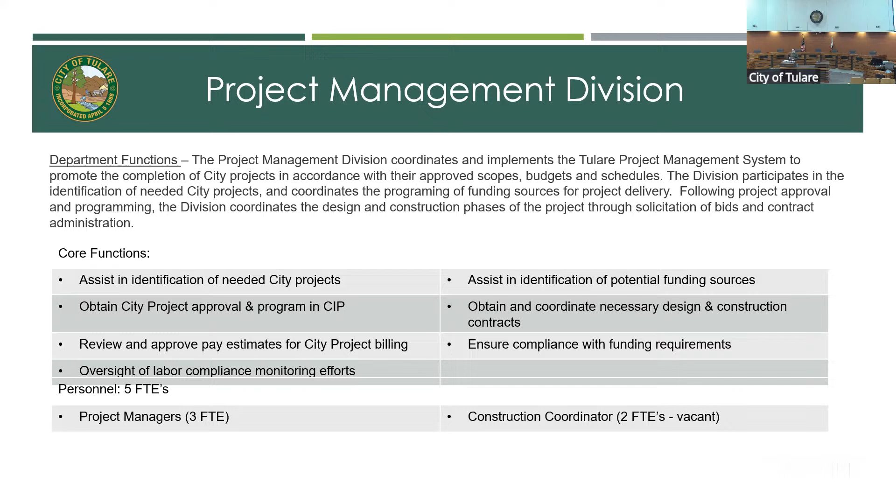So when I talk about public improvements, what do I mean by that? Here's some of them. Streets: you're all familiar with streets, the paved surface, curb, gutter, sidewalk, and street lights that provide roadway lighting.

Water systems, those are the main water mains and services to each house. Wells that draw the water up from the groundwater to supply the city system. And we do have water storage tanks now. We've had the big one near Tulare Union for quite some time, but we've been adding new water tanks throughout the city to help provide redundancy in our water supply.

Sanitary sewer system: there's sewer mains, laterals to each house and business, and lift stations. That's because basically our sewer system is a gravity fed system. Things flow downhill, but we can only go so far before we need to lift them back up so they can flow downhill again.

Wastewater treatment plant - the city has 2 wastewater treatment plants. We have one that treats domestic waste and one that treats industrial waste. Our industrial wastewater treatment plant is pretty large and impressive for the size of our city because of all the dairy industry that we have here.

Storm drainage systems: pipelines, drop inlets, drainage basins where we send the water either to a detention basin where it gets pumped into TID ditches, or more commonly now a retention basin, where we put the water and allow it to slowly perk down into the ground. There are also lift stations there because those systems are also gravity fed, and sometimes you have to lift it back up to keep it going.

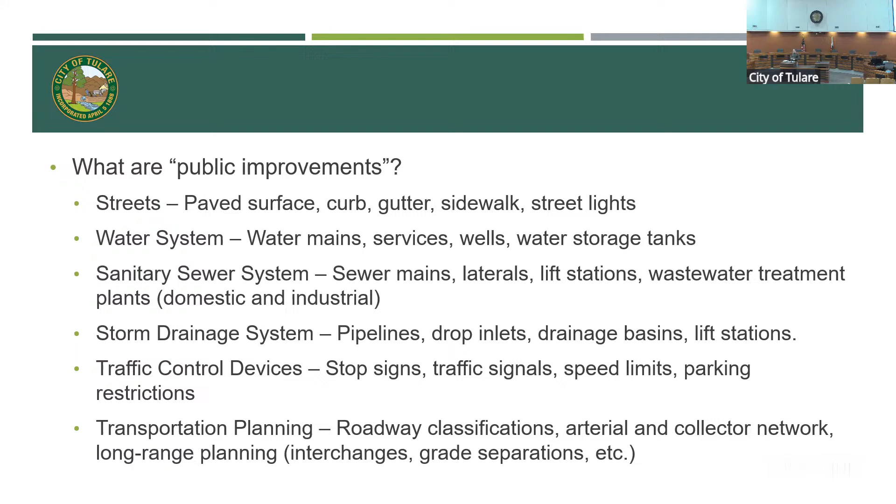So this is what your basic street looks like, right? A lot of people don't realize that it's a layer cake. You've got the asphalt surfacing sitting on top of an aggregate base that's kind of like a gravel type material that then sits on top of the native soil. So that's how our streets are constructed.

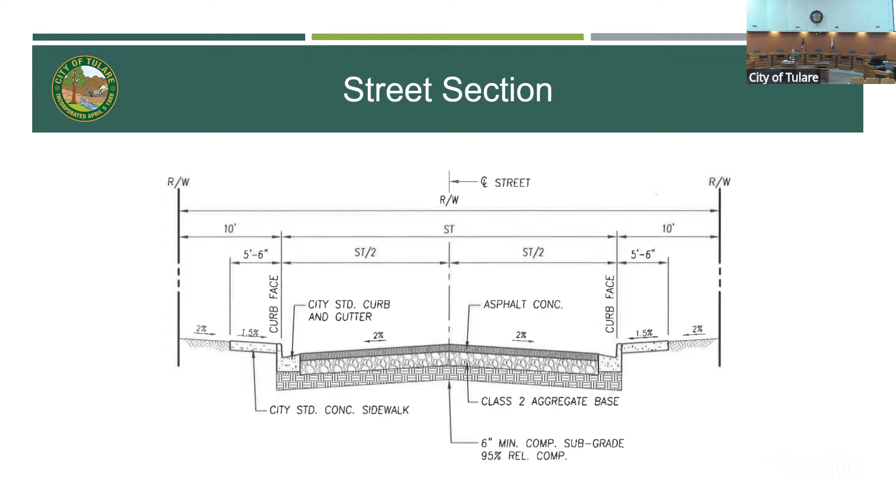What a lot of people don't realize is underneath the street, there's a lot more. There's the water, the sewer, the storm drain system. It gets really crowded under there, especially when you start also thinking about the gas lines, electrical conduits, telecommunications. It seems like a street's pretty wide, but when you start trying to fit everything in there and making sure that they don't conflict, especially when you have services going off serving the houses to the side, it gets pretty complicated.

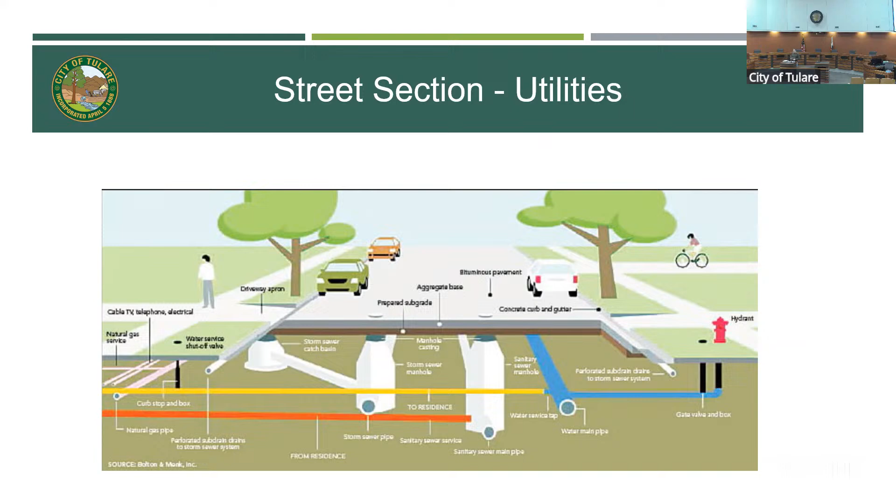So just want to focus on a few of the things, core functions in the engineering division that we get the most public interaction with. The first would be the intake and issuance of encroachment permits.

So what's an encroachment permit? Anytime anyone, private citizen, contractor, whoever, wants to construct improvements within the public right-of-way or within a city easement, it's required that they obtain an encroachment permit from the city. The exception is landscaping, provided it doesn't impact traffic safety, and landscaping irrigation systems. So this permitting process is intended to protect existing utilities, prevent future conflicts between property owner improvements and planned city improvements, and to give the city a chance to review and ensure that proposed improvements meet any applicable standards.

Some things to note: installation and repair of curb, gutter, and sidewalk in the city of Tulare is the responsibility of the fronting property owner. A lot of property owners don't understand or recognize that. They see the sidewalk in front of their house is cracking, it's raising up, it's becoming a problem. They'll call the city saying, hey, you need to come fix the sidewalk in front of my house, only to find out that, well, no, it's your responsibility to fix it.

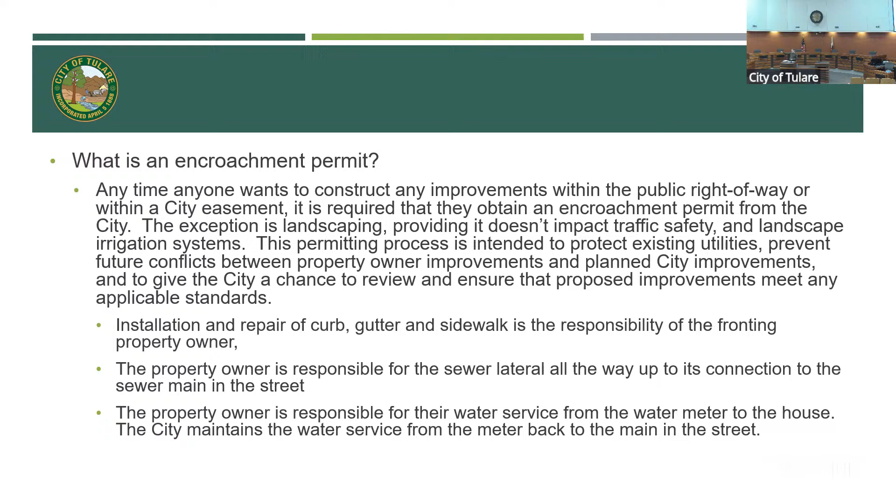It's another one we get a lot of public input about, or inquiries about: traffic engineering. Namely, why doesn't the city put in a traffic signal, put in a stop sign, or lower the speed limit? So to ensure uniformity among how traffic control devices are installed across the nation, the Federal Highway Administration created the Manual of Uniform Traffic Control Devices, known as the MUTCD.

It was recognized that establishing these uniform standards resulted in a safer environment for all roadway users - vehicles, bicycles, and pedestrians. The state of California has adopted a slightly modified version known as the California Manual on Uniform Traffic Control Devices, or CAMUTCD for short, which provides standards by which intersections should be evaluated for the addition of stop controls or traffic signals.

Some of the things they look at when making that determination of whether a stop sign or traffic signal is warranted would be collision history, the volume of vehicles going through the intersection, and the delay resulting - say if you're on the minor street waiting to pull out onto a busy major street, how long do you have to sit there before you finally get a gap in the traffic to be able to pull out. That comes into play.

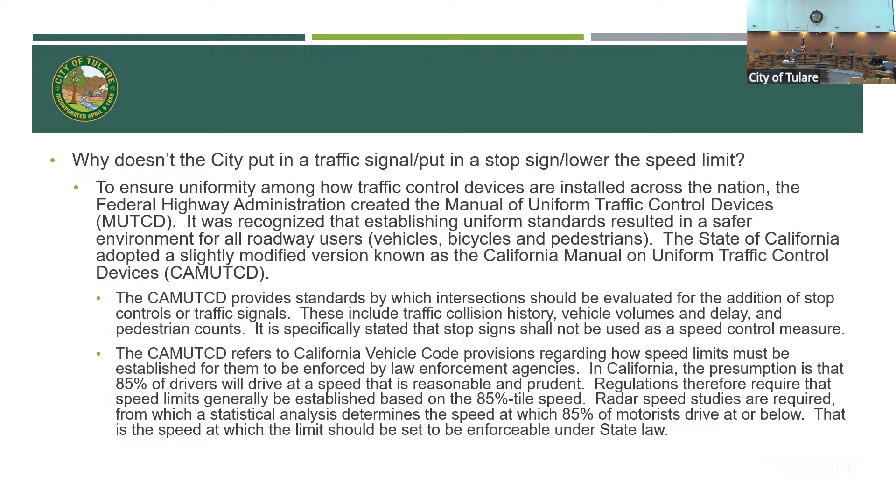So when we're looking at speed limits and setting speed limits, we'll go out and do radar speed studies, then do a statistical analysis to determine what speed 85% of the drivers drive at or below. That's the speed we're supposed to set for it to be enforceable under state law. There's a lot of debate whether 85% of people are reasonable and prudent anymore - I would say maybe not, but that's the way the law is currently set up. For our law enforcement to be able to actually write an enforceable ticket for speeding, the limits have to be based on that process.

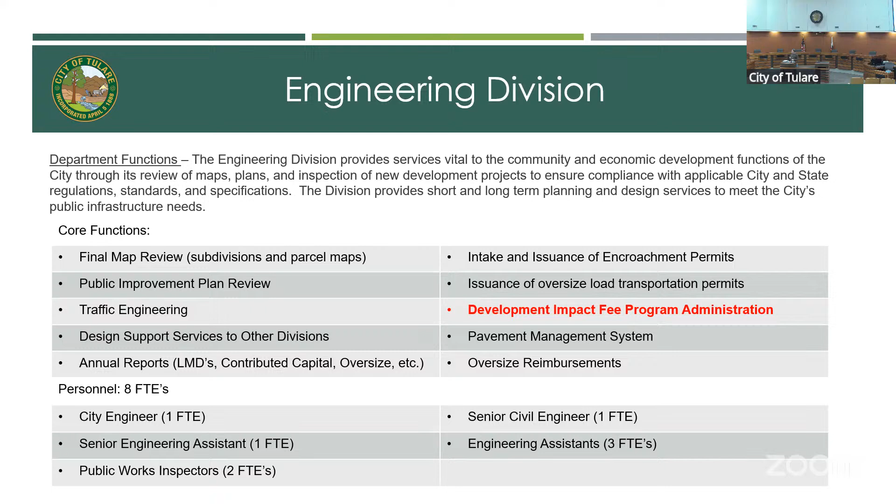Another area that maybe people don't know so much about, but I thought was worth highlighting, is our development impact fee program. Development impact fees are a one-time fee that we charge to new development projects to help mitigate or offset their financial impacts to the city. For example, a new residential development will increase the amount of sewage that our domestic wastewater treatment plant has to treat, so at some point we're going to need to expand the treatment plant facilities to accommodate the impacts of new growth. The development impact fees we collect are held in a special account to be used to help make those improvements at some point in the future to address those needs.

So we have several categories of development impact fees. Law enforcement - that goes towards paying for expanding the police department, additional vehicles for new officers, new equipment. Fire - same type of thing, if we need new fire stations to handle the new growth. General government facilities - that would be like the city corporation yard. As the city grows, we're going to have more refuse collection vehicles and more people working in our public works department, so it's going to need larger buildings. This is all to help pay for those increases. Other categories include library, parks, transportation, storm drainage, wastewater, water, and groundwater recharge.

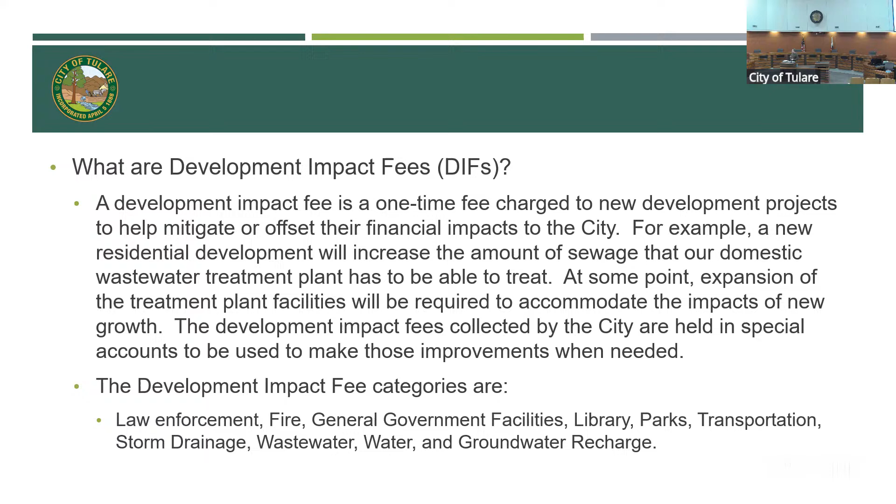So switching to our project management division, I wanted to give you an idea of the types of projects that they are currently working on or have recently finished up.

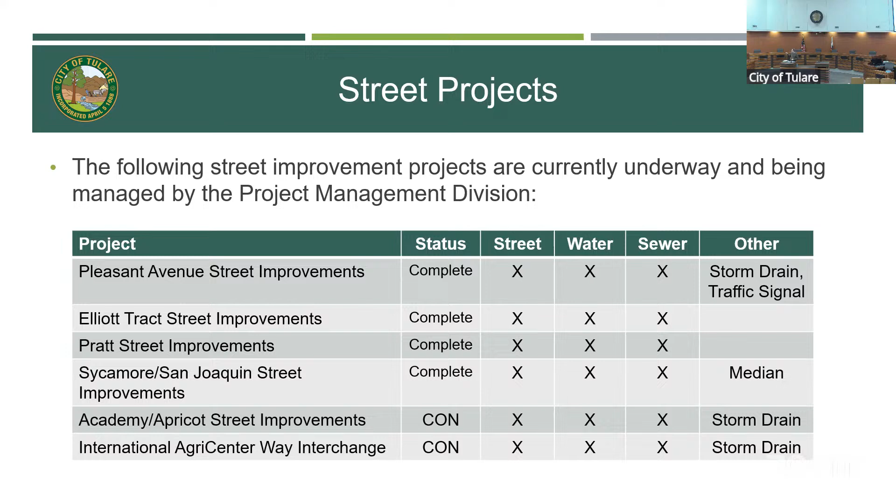I believe today they poured concrete, even in the rain. Yeah, even in the rain, they poured stamped concrete in the medians, so they're back underway, and hopefully we'll finish that up.

No, it's just to make the roundabout. Basically, they did a traffic impact study for that new residential subdivision that's on the north side of Tulare Avenue, at the northwest corner of Tulare and Morrison. And it added enough traffic to that intersection that it triggered the need for either a traffic signal or a roundabout.

It's a state highway intersection, so state highway intersections are Caltrans jurisdiction. So they had to go through a process where they worked with Caltrans to figure out what type of improvements to make at the intersection. Caltrans wanted a roundabout - basically, it was a big move to go with roundabouts. They're safer.

Basically, with a traffic signal, somebody runs a red light, you could have a car going 55 miles an hour fly through a red light and T-bone somebody. That's going to be a very severe accident, usually a fatality. With a roundabout, you've got to slow down to negotiate it, so traffic generally slows down to around 25 miles per hour. Generally, the worst thing you're going to have happen is kind of a side-swiping type collision. So they really are - studies have shown them to be significantly safer in the long run.

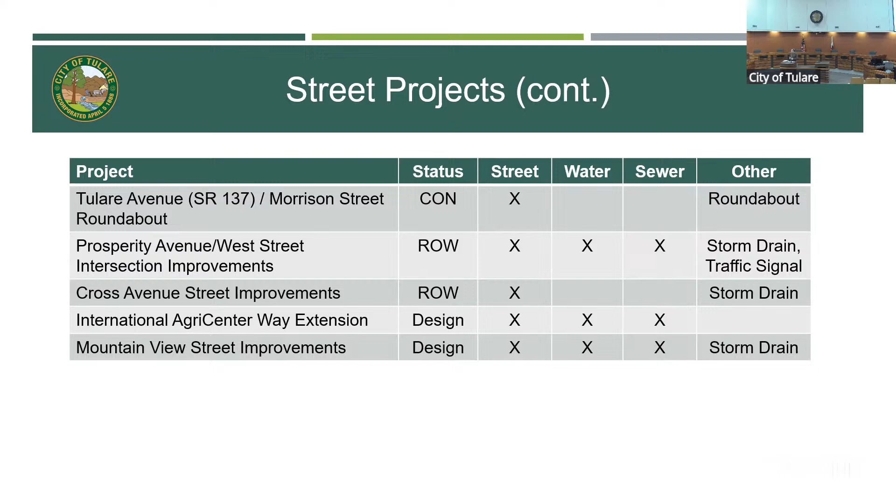Some other projects that are a little more out of the box for us. We're used to dealing with street projects, but this last couple of years, we've been dealing with some other interesting ones. Zumwalt Park renovation, you've all seen that, just turning out really, really well. Building an amphitheater and putting in substantial improvements in the park, a playground, splash pad, expanded restroom facilities. We are hoping this will be done at the end of March. It's still a little bit up in the air as to the exact time, but that's what we're shooting for right now.

Tulare Business Incubator, that's the old county courthouse that's on the corner of Tulare Avenue and N Street, as in Nancy, that concrete building that's currently all kind of fenced off. It used to be a county courthouse, sat vacant for many years. City purchased it. We're basically converting it to be a business incubator, going to be in partnership with our Chamber of Commerce. Startup businesses can come in, lease space in there for discount rates. There's going to be classes, I believe, offered to help people with their new business startups. There's also going to be some police services located in that building as well.

Tulare Homeless Shelter Project, another project near and dear to Councilmember Sayre's heart, is a project to build a 400-bed homeless shelter. It's located on O'Neill Avenue between K Street and O Street, kind of across from the continuation high school, Civic. This is actually a very neat, unique project. It also has a component of it that's going to have a modular village for people to basically move through multiple steps, stages. There's the entry level, low barrier, come in. There's going to be a bed for you. It's going to be a very big common area. There's a next stage where if you've taken on some responsibilities, maybe helping out at the shelter, doing things, you can move into an area where you have a little cubicle walls, a little more privacy.

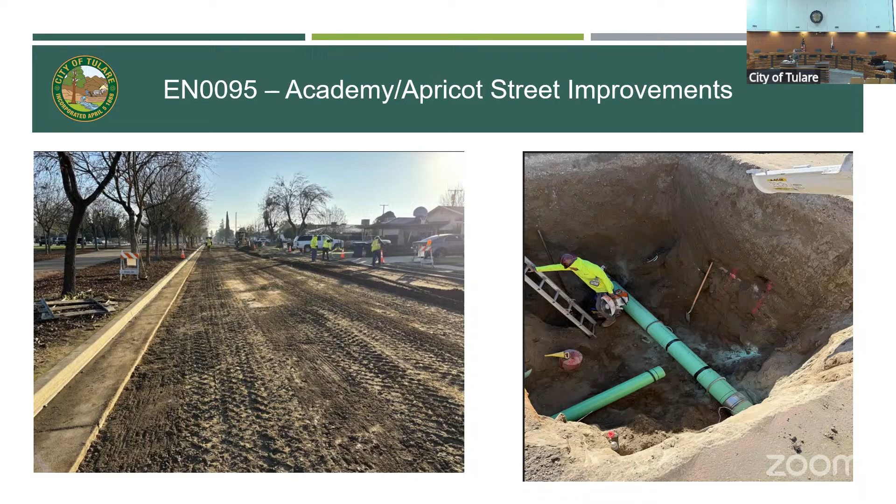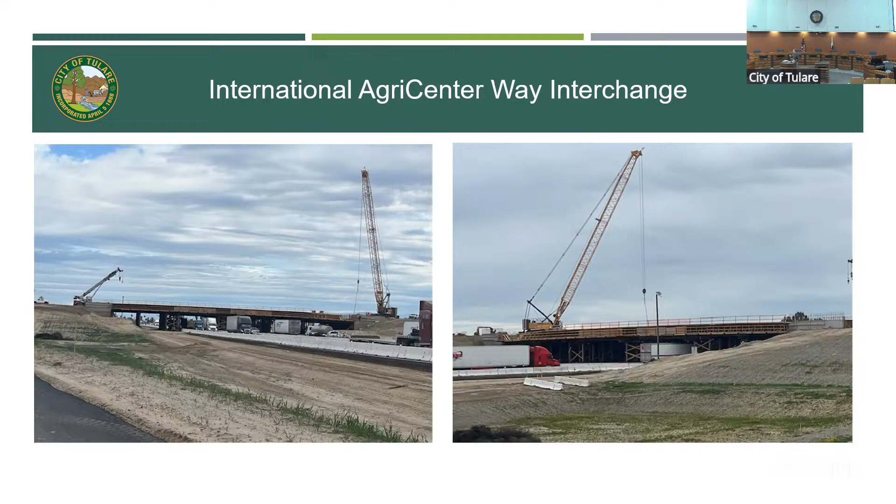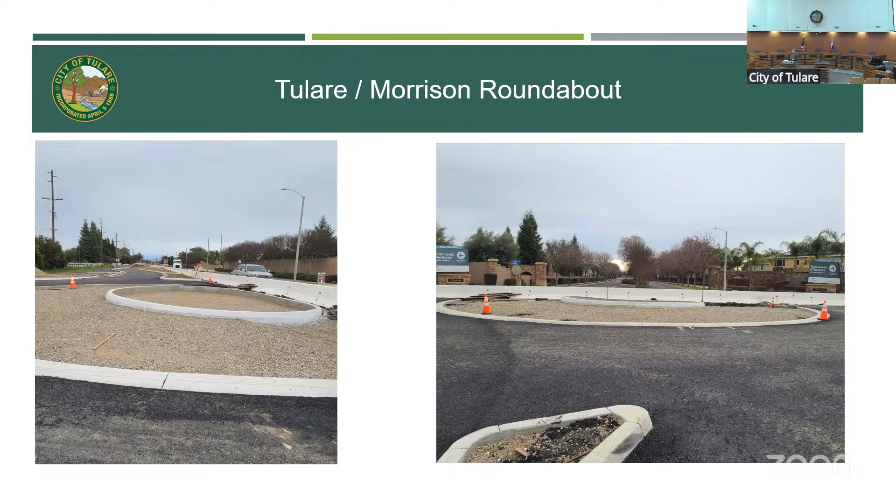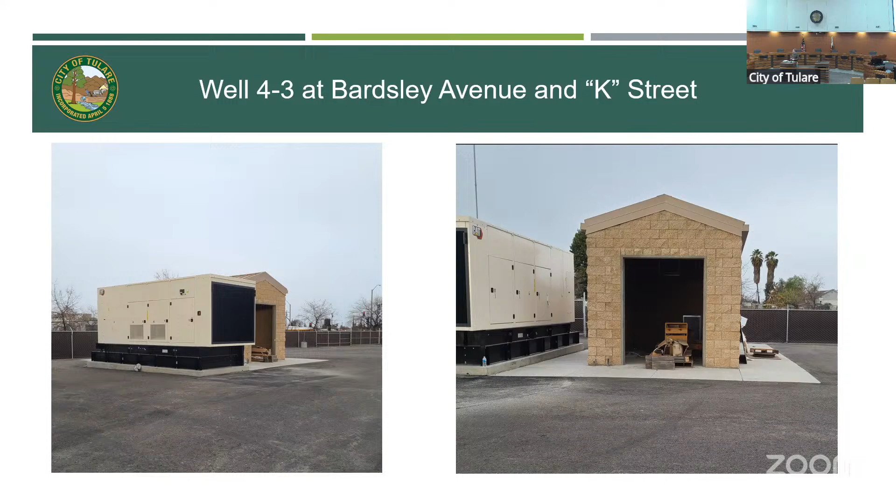This is not very exciting. This is what well 4-3 looks like. Basically a large generator, a concrete block building to house some of the well equipment, but there's not much to a well site to look at.

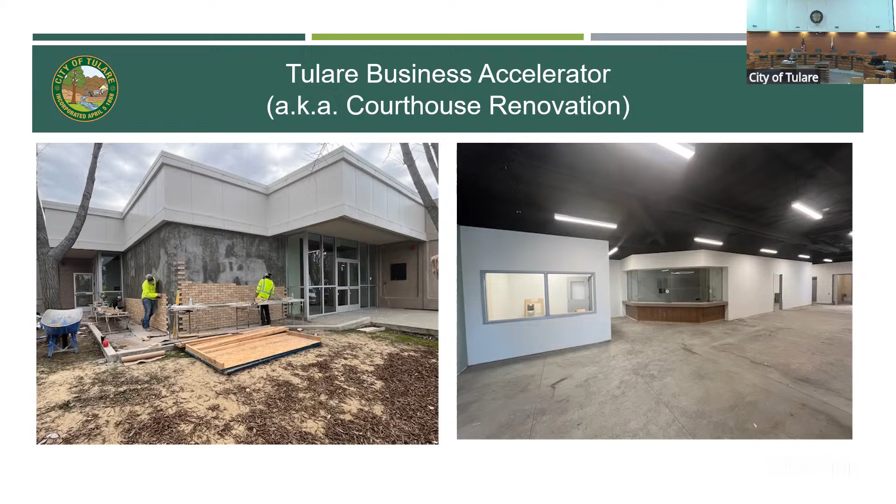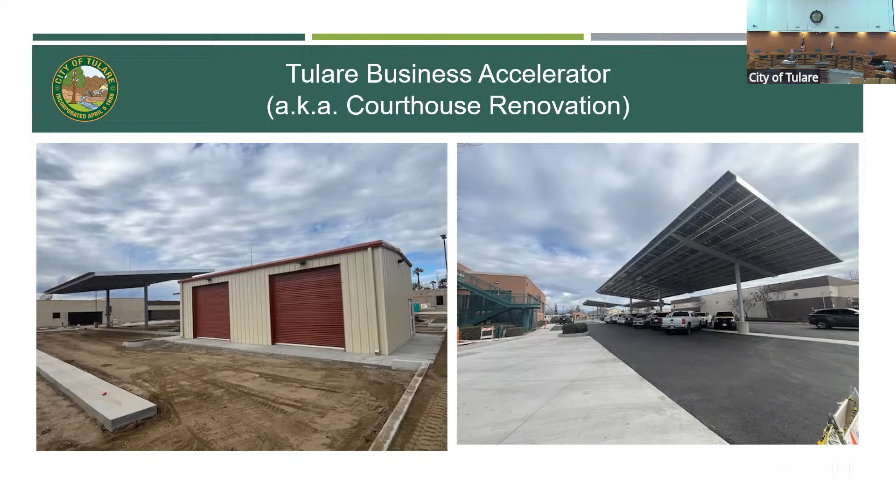Outside, there's some improvements associated with that. They're improving the existing parking lot back behind City Hall, new metal building for the police department, their investigations unit, and part of the city engaged the services of ENGIE Solutions to do numerous energy improvement projects throughout the city, like replacing old HVAC units with more efficient units, but one of the bigger ones was the solar canopies. Those were a component of the parking lot behind City Hall.

So that's kind of the end of my presentation. I welcome any questions you might have.